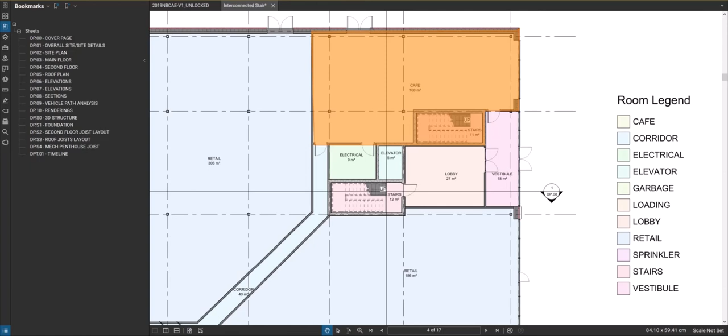And I'll just finish with the context of this. Here's the site plan. So, like I said, it's still being worked on, there'll probably be more glass on this wall. This door is probably better suited over here because presumably this is the back service corridor. So the back of house space would be probably here. Public space would be up here.

You're doubling up on the vestibule situation here, which is a good idea for a small space. You don't want to eat up your space with a vestibule in here, and also in the wintertime when the doors open, you don't want big wafts of freezing cold air coming in and chilling the patrons sitting at tables and stuff like that. So that's a smart move right there.

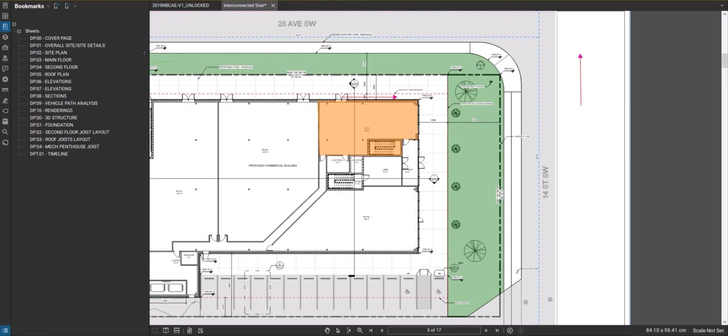The reason I say maybe this door is better off down here is because in this case the north is facing this way. Which is okay for a cafe. So I was going to say patio space right here on the north side is probably not ideal, but because it's a coffee shop type scenario, it does make sense that it could do well there, because in the morning time your sun's actually coming in from this direction and this direction and this direction. So there's some good potential here for some good morning patio space.

Now, before we get into determining whether we can open that stair up or not and have an opening through a floor area, let's just take a quick review, kind of high level, of have other exiting needs been met in this building. Now, I'm not going to crunch numbers and all this kind of stuff, but this is a general overview of what one should be looking for.

Okay, so let's just take a look at the main floor here. And in this retail unit here, this retailer would have their own exit out the front right there, and then they have their back exit as well. So in this scenario, assuming we need 2 points of exit from the space, again, that would depend on occupant load and travel distances and things like this, but let's just assume you needed those.

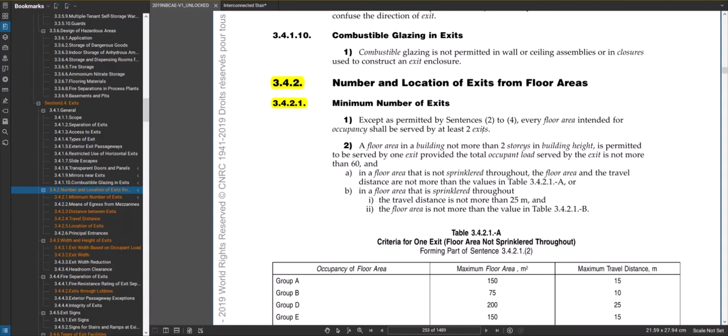If you had 100 people in this space, for example, then 50 will go out the front, 50 will go out the back. And so where that's coming from is 3.4.2.1, which pretty much starts off telling you that every floor area intended for occupancy shall be served by 2 exits, so that'd be a floor area. There is a criteria for 1 exit, so you certainly could look at that and see if you can get away with 1 exit, but usually you have the back exit anyways. So in that case, let's assume you need 2.

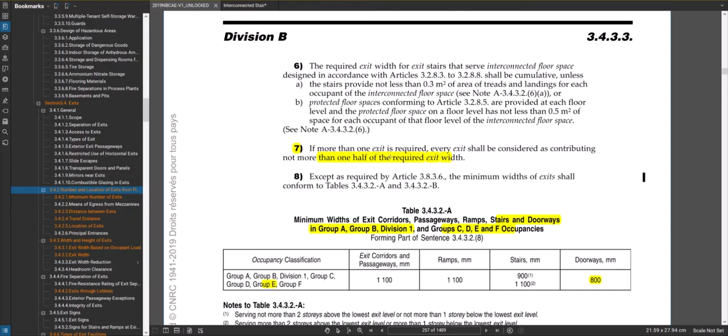And then if we cruise ahead to 3.4.3.2 under your exit width, if you read sentence 7, if more than 1 exit is required, so let's just assume that those 2 exits were required from that space, then every exit shall be considered as contributing not more than 1/2 the required exit width. So in a nutshell, what that basically means is if you had 100 people here, you'd assume 50 out the front, 50 out the back.

So obviously if they go out the back, then you'd have to check to see where they're going. So they'd enter this corridor here, and they got a door right here, so that'd be fine. They can get out that way. So probably that's okay. That probably checks out. The second retail space, so this could get subdivided into two spaces, but they do have the front access points and then a back access point.

So that's good. Now you'd have to check distance between exits is met, but presumably would be, and you could assume that if these two were far enough apart and so on and so forth, then you could assume 1/3 the occupants out of each one of these doors. Essentially, this retail unit right here, half that way, so that looks to be fine.

Now again, when you think about the exiting of, say there's 50 here, 50 here, and 50 here, let's just say for easy numbers, you'd have 150 people. Now they're all going to be sharing this corridor and this exit door on the exterior. So you'd have to multiply that 150 people by 6.1. Okay, so you're taking the occupant load and you're multiplying it by 8 or 6.1 in this case.

And so actually, if that was the actual number, oddly enough, 150 times 6.1 gives you 915 millimeters. So this door here would have to have 915 millimeters clear for that to meet code, basically based on occupant load. So that's pretty tight. If you put in a metric door, it's only going to be 900 wide. If you put in an imperial door at 3 feet, you're going to be 915. But you also have door stops in there, which eat into that.

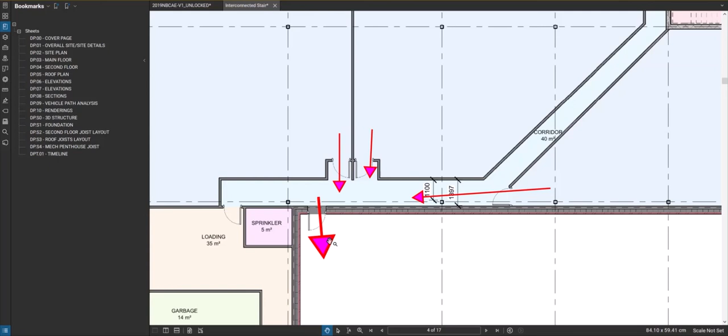So in this case, I would go to one door size bigger, or do a set of double doors there to the exterior, which probably is better. I guess they're loading from the interior, but I was going to say it could be good for loading as well. It is possible that you could say, well, some of the exit capacity could go that way, but then you got to deal with painting off the floor and stuff, and dealing with other stuff if you exit through a corridor. So the best scenario would be to deal with it right there.

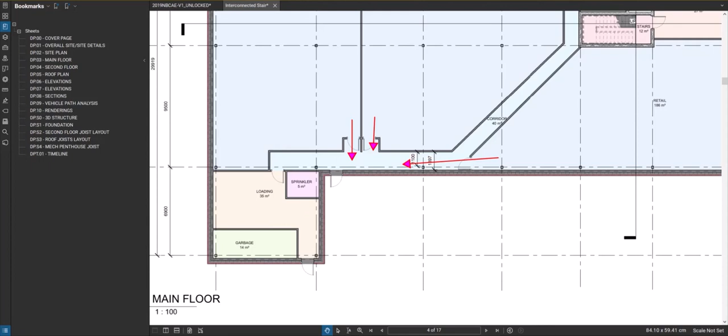Okay, so anyways, the exiting on the main floor seems to check out. The cafe's got a couple of options here, so that's fine. Actually got a few options there. It doesn't look like there's any issues there. We'll just head up to the second floor here and see what's happening right here. So a couple of office spaces. So if we start with the office on the top here, this could be subdivided, but let's just say it was going to be all one unit like it is.

Then you would again calculate your occupant load for this space, and you would start to check how many egress doors you require from this office space. And if we just go to that part of the code, 3.3.1.5, it tells you that you need a minimum of 2 egress doorways from a suite, but then it talks about, well, maybe you can get away with 1. Okay, so looking at the size of that space without crunching numbers, it looks like probably it needs the 2. And again, that would just be based on occupant loads and travel distances and things like that. So let's just assume it does need the 2.

Egresses from that suite. And knowing it needs 2, then they got to be placed at a certain distance apart from each other. Okay, so you'd have to read that sentence right there. So 3.3.1.5.(2) would tell you they got to be placed at a distance from one another equal to or greater than 1/3 the maximum overall diagonal dimension of the area to be served. So basically, you would take a look at this one and say, well, my diagonal dimension in this case, it's a little bit gray, but maybe you say it's like that, and you would take 1/3 of that, okay?

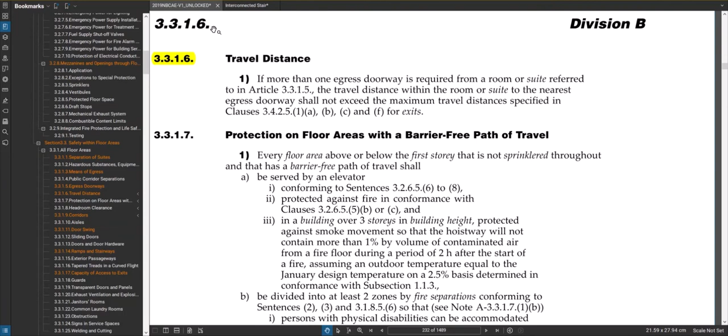And then for the travel distance, really what that is, is sentence 3.3.1.6, and it just refers you to another part of the code. And if we went to that part of the code, I think it would be for business and personal services. If you're not sprinklered, 40 meters. If you're sprinklered, it looks like 45 meters. So I would say in this case, they have no issues at all looking at this. But you would certainly prove that through your code plans, what the travel distances would be.

And I guess what I'm saying is, if it turned out that, say, this dimension right here, let's just say you did this as a path of travel to that door, if that was 45 meters, then you got a problem, because by the time you put in offices and cubicles and stuff, that path of travel might be like this or something, right? And then you exceed it. So you always want to make sure you're a good 15-20% below that maximum travel distance, so that the space can easily be fitted out and still meet code.

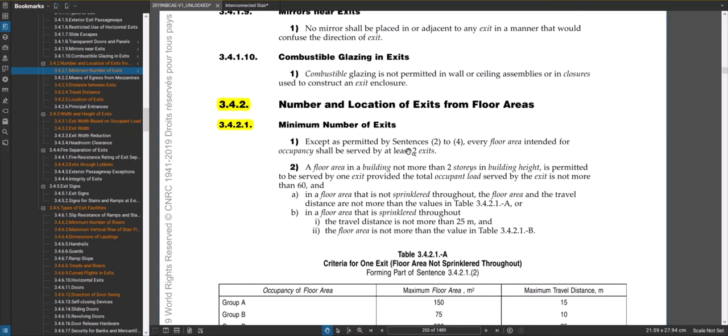But anyways, that checks out, and the same kind of rationale would exist for this unit on the other side of the corridor as well. Something else I would check on the second floor is the number and location of exits from floor areas. So again, except per some sentences, every floor area intended for occupancy shall be served by 2 exits. And if you go on, there is the possibility of doing 1 exit. But if we go back to this space, you would probably need 2 exits in this scenario. And here's one over here, and here's one over here.

The other thing I would check here is 3313 in your means of egress. If you go down to sentence number 7, at the point where a doorway referred to in sentence 8, and sentence 8 is talking about a doorway that goes from a suite into a public corridor, which is exactly what we have. We have doorways from suites into a public corridor. Then sentence 9 is telling us that where that doorway opens into that public corridor, it shall be possible to go in opposite directions to each of 2 separate exits.

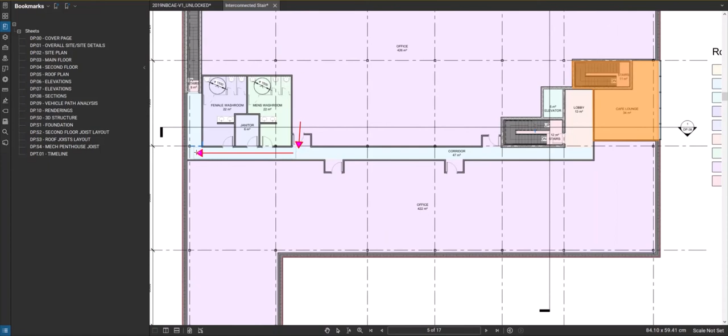Okay, so let's just take a look at that. We come out this door here, and we have the option of going this way to an exit, and we have the option of going this way to an exit, so that's good. And the same would exist for all these other doors, so that checks out as well. And again, though, you'd have to check travel distance now from the suite door. You'd have to check your travel distances to the exits and make sure they don't exceed the maximums.

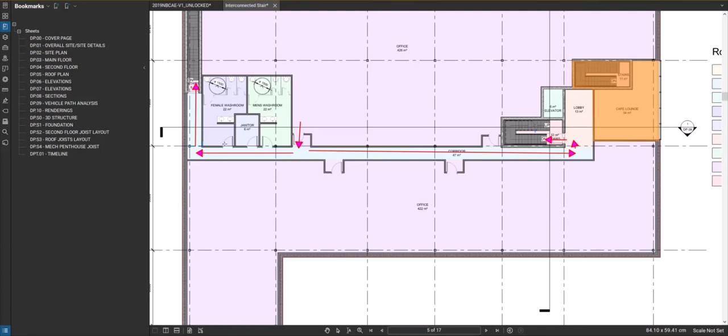And I can tell just by looking at this plan that it's fine, but let's just take a look at that. And that took us right back to the article that the egress door situation took us to. So if it was a sprinklered building, in this case, it'd be 45 meters. So looking at this, from these egress doors, you're not going more than 45 meters. And the reason you're allowed to take that measurement, that 45 meters, not say from the farthest corner, let's just say maybe this is the farthest corner, the travel distance of 45 meters isn't like that in this case.

It could be sometimes if there was no public corridor, it would be, but when you have the public corridor meeting certain requirements, you have the egress door travel distance requirement, but then you have another travel distance requirement from that egress door. And where I'm getting that from is from 3424 sentence 2.

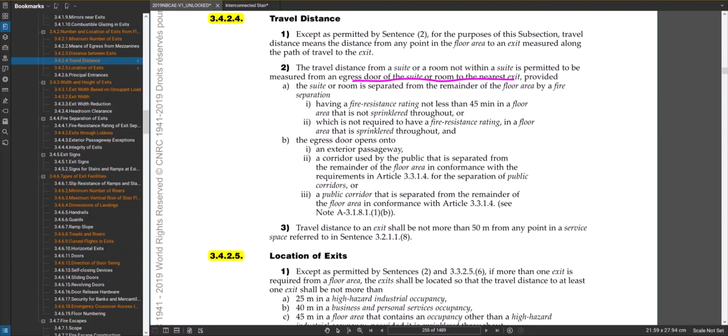The travel distance from a suite or a room not within a suite is permitted to be measured from the egress door of the suite or room to the nearest exit, provided the suite has a fire separation from the public corridor and blah, blah, blah. There's some requirements there, but we'll assume that in this case, that corridor is going to meet those requirements. But certainly something you would check and make sure is accounted for in your building code summary and design of your space. So anyways, in summary, the quick check of our egress and exiting scenario in this building, everything seems to be in order.

Again, all those fine details would have to be fleshed out, but from a higher level, it looks like everything is satisfied here. I don't see a dead-end corridor situation either. So, you know, there is a danger of a dead-end corridor here. Like if you were exiting this way, you don't want to overshoot this door by too much, like run past it basically. And so that magic number is 6 meters.

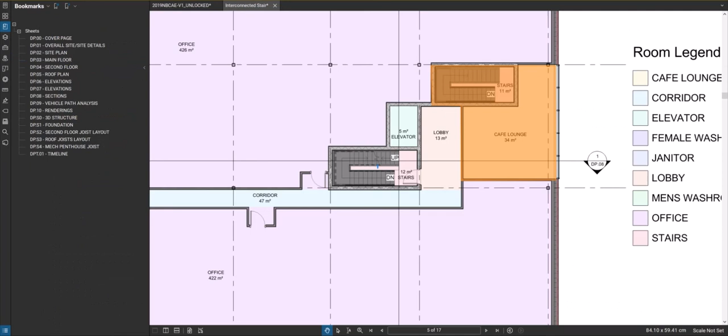You can't be more than 6 meters distance there. And where that comes from in the code is 3.3.1.9, the last sentence in that article. There's that 6 meters right there. Okay, and so now to the purpose of this video: let's figure out, can we have that stair open? Okay, so overall, the exiting strategy seems to work. So let's see what we can do here.

And now to check this, we're going to go to section 3.2.8, which is mezzanines and openings through floor assemblies. So basically, if we do that stair open, assuming that the floor that stair is going through is, say, a fire separation, then we have an opening through a floor assembly. And so sentence one here in 3.2.8.1 pretty much says, except as permitted by some other articles here, the portions of a floor area that do not terminate at an exterior wall, a firewall, or a vertical shaft shall terminate at a vertical fire separation having a fire resistance rating, blah, blah, blah.

So what that's basically saying is that any portions of the floor that don't terminate at, say, an exterior wall or a firewall or something like that need to terminate at a vertical fire separation, so a wall basically. So this is essentially where a fire separation around a stair, for example, is coming from. It's basically coming from that idea that the floor has to terminate at this vertical fire separation. It can't just be left open.

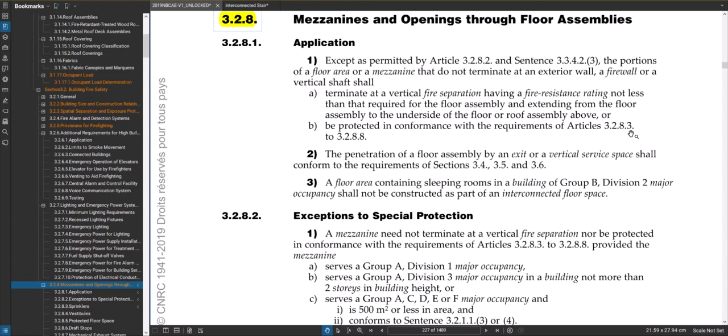But it goes on to say, if you don't have that vertical fire separation, that wall, it's got to be protected in conformance with the requirements of Articles 3.2.8.3 to 3.2.8.8. So this is a typical situation, say in a mall or in office buildings, where you have a second floor and you can look down onto the main floor, or multiple floors. Those are called interconnected floor spaces, and essentially, the code starts off by telling you, no, you can't. You got to put that vertical wall in at that spot. But then it says, if you don't do the vertical wall, you just got to meet these requirements here.

So we'll just skip ahead. I'm going to skip this section here and just go to 3.2.8.3 and see what some of those requirements are. So first of all, it says, okay, if you're going to have these interconnected floor spaces, let's just go to that definition. Interconnected floor space means superimposed floor areas or parts of floor areas in which the floor assemblies that are required to be fire separations are penetrated by openings. So that's exactly what we'd have here.

We're to assume that the floor in this building right here is a fire separation. It probably is in this case. And we are going to penetrate it with an opening now that's not going to have closures, okay? And it's not going to have the vertical fire separation around it. So in that case, okay, got to be sprinklered, fine. There's a requirement here for some vestibules. There's a requirement for draft stops.

So often when you see an opening like this, you'll see a panel, usually glass, that rings the opening basically, and they've got to be 500 millimeters deep, for example. And there's some mechanical requirements there, and so on and so forth. So there's a bunch of rules there, which you'd have to look through and make sure that you meet, and then you could do that interconnected floor space. But

there's also exceptions to this, okay? Exceptions to special protection. So here's where I'm hoping that this stair ends up. And now you'd have to read through all these sentences carefully to see which ones apply to you. Again, this is an exception to special protection. So the special protection is 3.2.8.3 to 3.2.8.8. And if we go down to sentence number 6 here, an interconnected floor space need not conform to the requirements of Articles 3.2.8.3 to 3.2.8.8, provided it consists of the first storey and the storey next above it or below it, but not both.

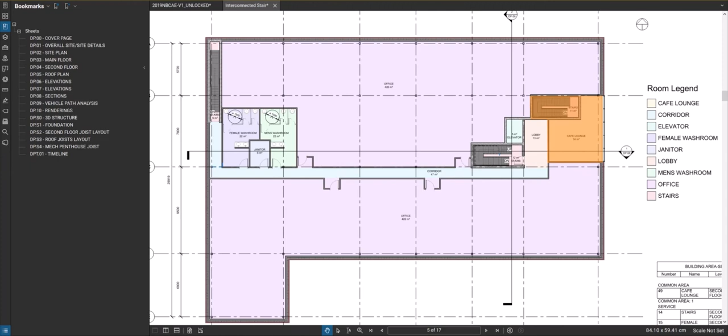Okay, so the next thing one would have to consider, now that we've determined the stair is open, is, let's just assume that this was closed off completely right here and the intent was not to have any access into there. I think there'd be a problem with that in this case. If this was a mezzanine to the main floor, then potentially you could get away with just having this egress stair, as long as you

are able to travel from the farthest point here down the stairs into an exit within a certain distance, and some other rules. But the problem is that this space on the second floor wouldn't classify as a mezzanine. If you read the definition of a mezzanine, it wouldn't be a mezzanine. So what one could look at here is if this is just another suite here, which essentially is what it is, could you get away with one egress from this suite?

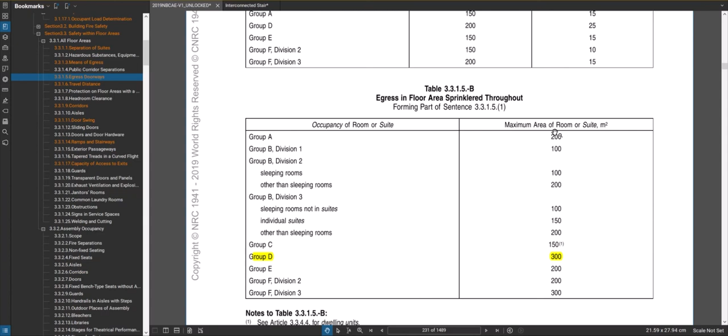And so where that would take you in the code is 3.3.1.5, and it starts off by saying, except for dwelling units, a minimum of 2 egress doorways are required from a suite. If you're of this use or you exceed an occupant load of 60, I don't think that space would. If this is a sprinklered building, then the travel distance to the egress doorway is 25 meters, and for Group D, you couldn't have more than 300 meters squared of that space, so this area couldn't be more than 300 meters squared.

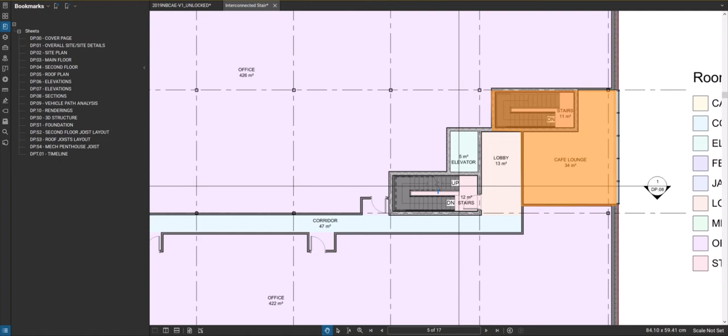And I think there'd be an argument that you can get away with one egress from this space, as long as you met all those rules. But I think it's a little bit gray in the code in that sense. And the part that starts to really become problematic is this sentence right here, 3.3.1.3, means of egress, sentence 8. Each suite in a floor area that contains more than one suite shall have a doorway into a public corridor. So this is a floor with multiple suites, so you need to have a doorway into the public corridor. And the exceptions permitted by these two sentences have to do with residential uses.

And now the catch here is, this says we have to lead into a public corridor, and then it goes into 9, and that's where it says you have to be able to go in 2 directions. So you've got a bit of a problem here. Once you enter that public corridor, you can't actually go in 2 directions. You just go in 1 direction. I think it's probably arguable that because people could still go this way, and it's small and all that kind of stuff, it's probably something that could be relaxed.

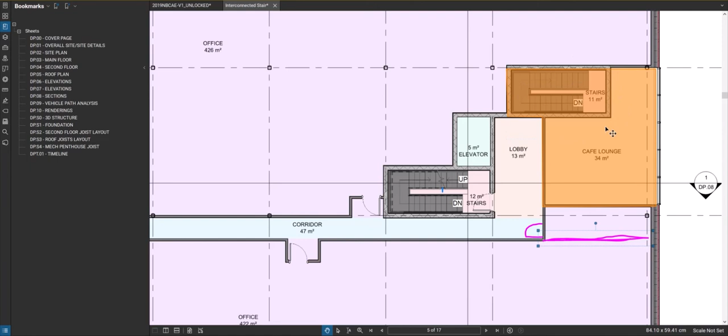But worst case scenario, maybe you just increase this space a little bit and you put that door, as long as you don't reduce your corridor too much there. Looks like it's fine. And now it's arguable that if this was the egress door out of here, you can go in 2 directions to an exit. So probably I would look at doing that just to be sure. Otherwise, from what I can see in the code, it's a little bit gray taking the approach that I talked about, but it's certainly something that could be discussed with the plans examiners.

And I think it's reasonable if you had a door here that you still have the option to go down, and you still have the option to go this way if you need to. It seems pretty safe for the size of the space and how many people would be in there, but I just can't find an article that would support that 100%. So I think if you had this situation, with this, then it's supported pretty well in the code.

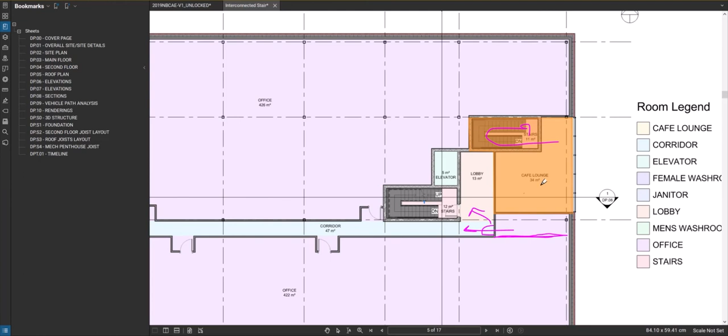So anyways, that's a pretty interesting situation. I think there's no problem doing that open stair there, and I think that was a good overview of exiting as a whole, kind of the approach to things. So that's all I had to say about that.